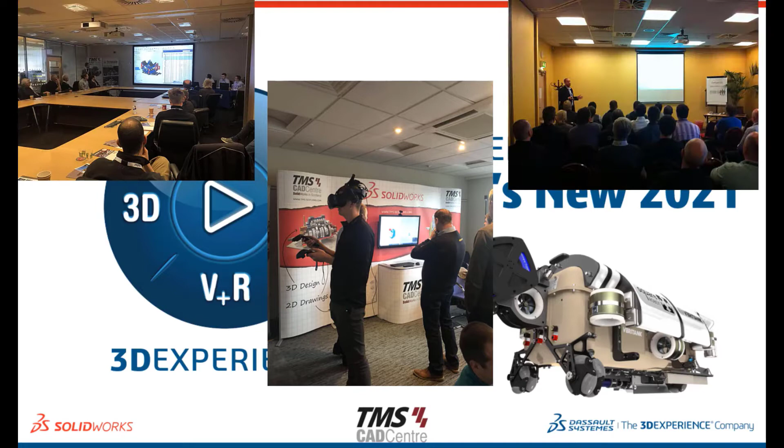Normally, at this time of year, we're travelling around presenting the new tools and enhancements in person at various locations. Like most events of 2020, we've had to adapt this content and deliver it online. After testing several different platforms, we've decided this year's launch event is best delivered through a Teams live event.

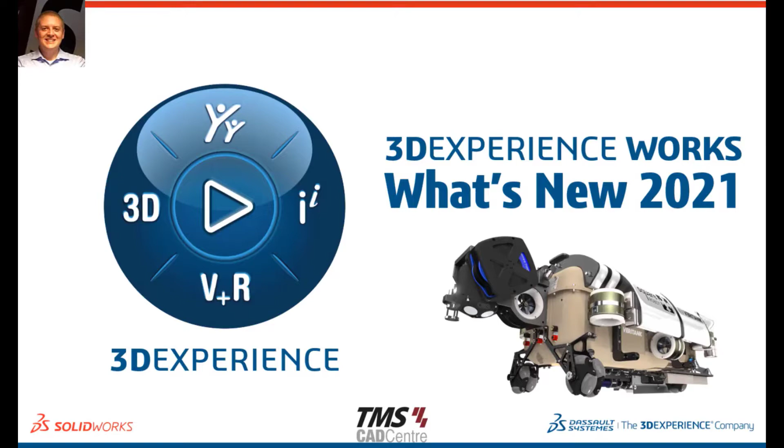Okay guys, so before we get started, we just have a quick video about the model we'll be looking at this year, which is the Square Robot, and you can see it in the background there. So I'll play that for you just now.

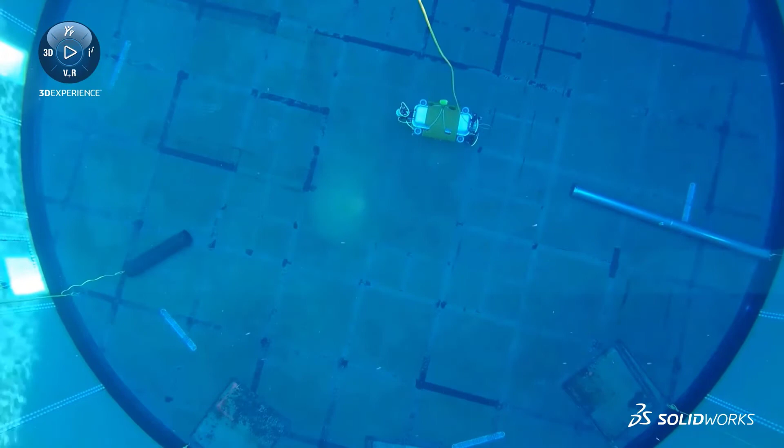Tackling the inspection of dark, harsh, and sensitive environments is the specialty of Square Robot, a startup based out of Boston, Massachusetts. Using advanced submersible robotics lowered into a petroleum storage tank, they autonomously inspect these environments for defects in the storage vessel using state-of-the-art sensing technology. By being able to use robotics for this task, they have reduced costs for their customers while improving accuracy. Their design is focused on safety and reliability for these unique environments, providing maximum uptime and allowing inspections to take place when and where humans would have to otherwise wait for the tanks to be empty.

Founded in 2016, Square Robot chose SolidWorks and Enovia Works as their go-to design and management solutions. It was critical for them from the start to have the ability to work from anywhere, combined with best-in-class design tools.

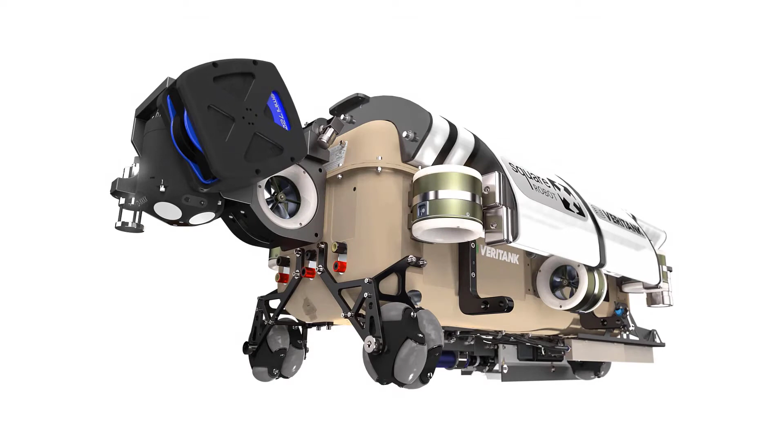So as we dissect this assembly over the next few days, we'll show you some of the enhancements to SOLIDWORKS and to the 3D Experience platform.

If we take a look at what's to come over the course of the event, first we'll have a quick preview of some of the enhancements that will help you simplify and accelerate your use of SOLIDWORKS. Then Craig is going to look at some performance-based enhancements, with an increased focus on performance and reliability this year, as well as some improvements to pre-existing workflows.

We're then going to demonstrate a whole bunch of SOLIDWORKS enhancements one by one, so you won't miss out on anything this release has to offer. Today we'll see parts, assemblies and drawings, as well as a few other tools such as MBD and Visualize, and tomorrow we'll continue this section and take a look at simulation and PDM, among others.

Finally, on day 3, we'll switch focus to the 3DEXPERIENCE platform, but not away from SOLIDWORKS. In fact, we'll show you how SOLIDWORKS can be connected to the platform. We'll also see what we can do when we pair simulation with the cloud. And finally, we'll look at a project from start to finish, completed using the platform's browser-based apps.

Just like everything in 2020 though, things are a little different this year. For example, some of you may be wondering why the title of this event is 3DEXPERIENCE WORKS What's New as opposed to SOLIDWORKS What's New. Basically, Dassault Systemes is starting to fade the line that divides their most powerful solutions, and these solutions are now being united onto a common space, known as the 3DEXPERIENCE platform.

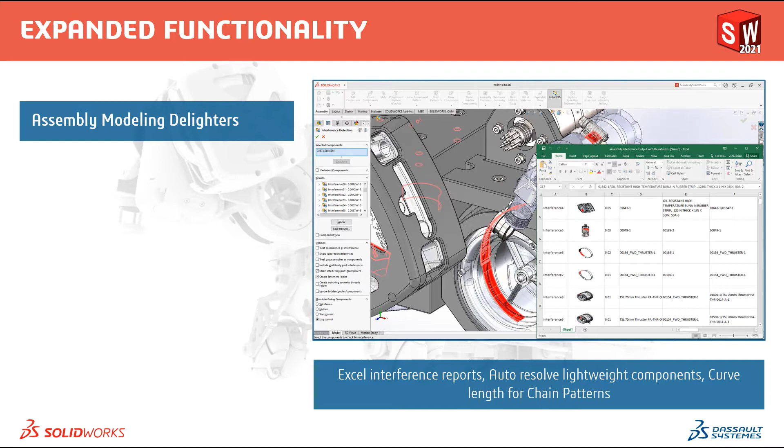We've got some improved assembly simplification tools, so we've got the option to save defeatured models as configurations, and also the ability to toggle between full and simplified versions.

In part design, we have some more flexibility. For example, the redo function is now available on over 60 features. In sheet metal, we can create edge flanges on non-planar edges, and we can now use equations in our file properties as well.

The user interface of SOLIDWORKS is known to be quite intuitive and customizable. However, SOLIDWORKS 2021 comes packed with enhancements that make it even easier to use and even more customizable.

We'll see an improved colour picker, which can reference other applications such as web browsers, a command search within the Customize dialog, making it easier to customize our toolbars. We've also got a collapsible command manager, which gives us some more space to work.

And we've got some semi-transparent dimensions now as well that make it easy to select entities when we're adding dimensions to our models. Last but not least, we have simulation, which is not only easier to use than in previous releases, but also comes with some great improvements to help us get accurate results quicker.

In flow simulation, the free surface option can now be used with rotating regions to take on more complex mixing projects. And with plastics, we have a simplified setup and expanded manufacturing processes.

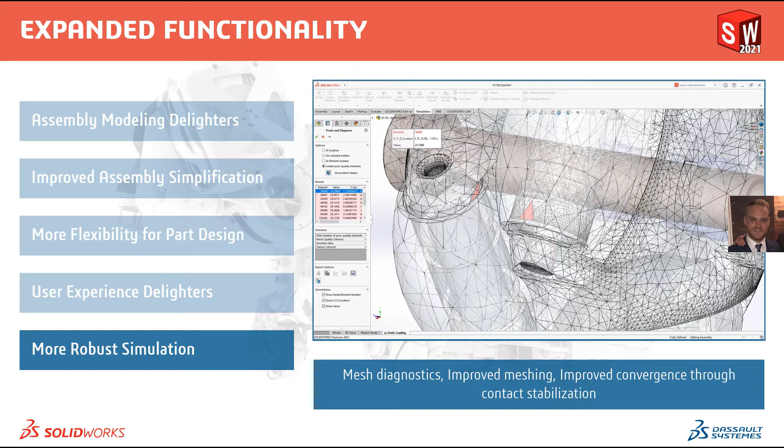We'll see these features in more detail over the next couple of days, but I'll hand you over to Craig now, who's going to take a look at some performance-based enhancements.

Thanks, Scott. All the new performance-based enhancements in SOLIDWORKS 2021, from new performance enhancements to assemblies and drawings to more robust simulations, will ensure that more of your time in SOLIDWORKS is focused on design. I'll go over a few of the performance and reliability improvements briefly now, and then we'll go into them in more detail as we go through the rest of today and the 2 subsequent days afterwards.

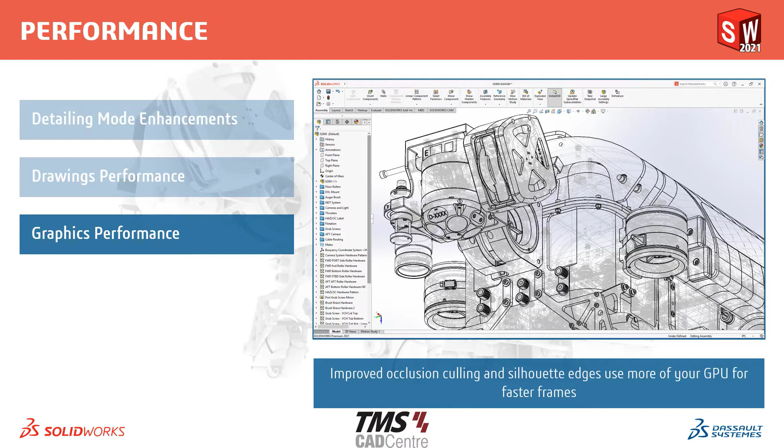Speed up your drawing creations with improved detailing mode with even more editable features and abilities than were previously available. Selection, panning, and fast zoom make your everyday work faster. Improved occlusion culling and silhouette edges use more of your GPU for faster frames. Faster file operations, configuration switching, and automatic lightweight mode resolving all help with the most complex assemblies.

If you're using SOLIDWORKS PDM, you know much of your speed comes from the efficiency of the database. PDM 2021 offers performance improvements that make most of your daily file operations and workflows significantly faster. Those faster operations include things like checking in files, adding new files to the vault, changing the state, opening files from the vault, saving files to the vault, and destroying files, although that last one you probably shouldn't be doing too often.

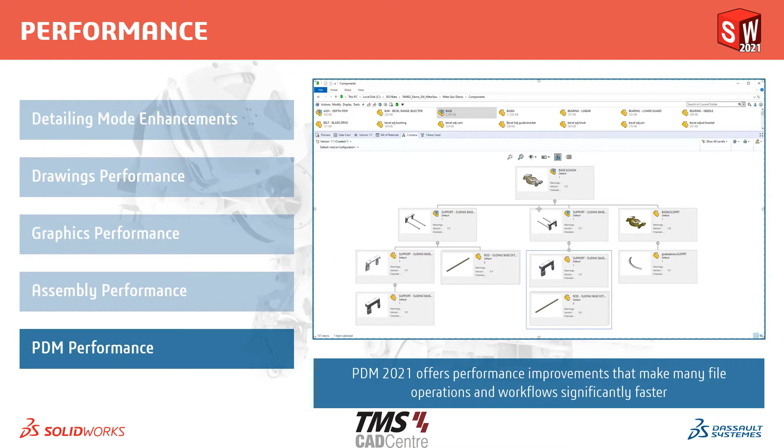Every year, SOLIDWORKS focuses on enhancements, innovations, and quality and performance. This year, SOLIDWORKS dedicated around 58% of its resources focused on the number one thing that you as customers have asked for: quality and performance. These are areas that SOLIDWORKS always focuses on, but this year there's been an extra effort to achieve even more remarkable improvements for this particular area.

The second two largest areas were enhancements, so actually new features to the software, as well as starting to integrate the 3DEXPERIENCE side of things with SOLIDWORKS, so there's a combination between the two. These focus areas were also partially derived from customers themselves, so there was a survey that went out last year on the SOLIDWORKS forums asking users what areas you would like SOLIDWORKS to focus on more, and that's what SOLIDWORKS tried to replicate here with the results from that survey.

SOLIDWORKS 2021 and the development cycles associated with it have closed more SPRs than any other release of SOLIDWORKS ever. If you're unsure what an SPR is, it's a software performance report, and pretty much any time someone finds a bug in the software, that's where an SPR is then created for the development team to work on and fix for a future release. This has resulted in a 25% increase in verified fixed SPRs since 2015, meaning that more SPRs, more bugs are being fixed with the newer releases.

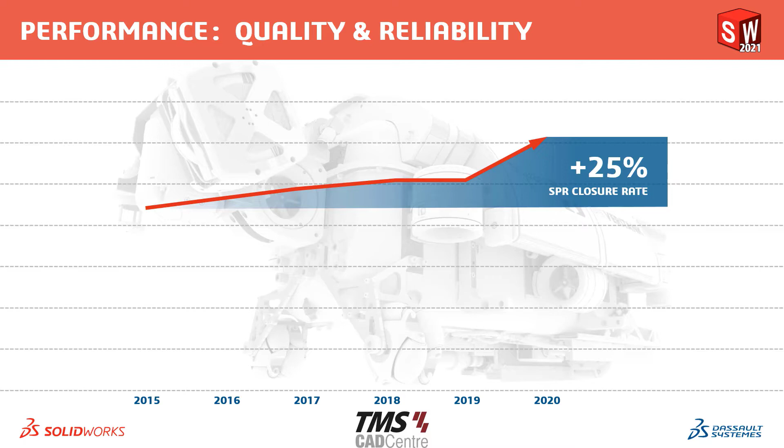It wasn't just about fixing low-hanging fruit, small wee tiny bugs. The focus was on areas that matter most to you and that have the largest impact. SOLIDWORKS categorise SPRs based on 5 severity levels, severity 1 and 2 being the most critical, as they have the most significant impact on day-to-day users. Severity 3 and 4 focus on the tools that you still use every day and making sure they work and give you the results you expect.

Finally, there's Severity 5. These are things like minor nuisances with the user interface, and these are still important, and that's why they are still fixed with SPR releases, but obviously that priority is generally with the higher severity issues. The predominant focus in this area was really to close down anything in that severity 1 through 4 range that has the most impact on users.

Over the last year, we've seen that significant reduction in open SPRs for severity 1 through 4, open meaning they haven't quite been resolved yet. SOLIDWORKS' goal over the next release is to get this down to less than 10%. They might not quite be there yet, but this is the focus to ensure that you guys as customers have the most robust and reliable design tools available.

So that's a brief overview of the performance side of things. So now I'll pass it back to Scott, who'll get into the meat and guts of SOLIDWORKS itself and everything that's new inside there.

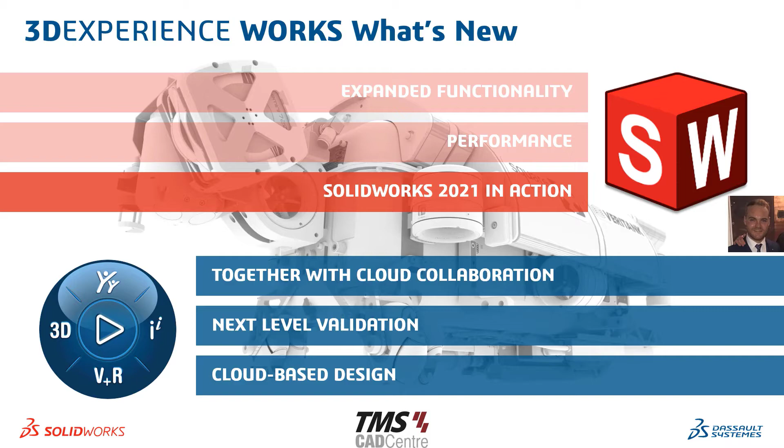Thank you, Craig. So now that we've seen some of the highlights, let's take a more detailed look at SOLIDWORKS 2021 in action. So each section that you see here has several demonstrations which highlight the enhancements made to SOLIDWORKS 2021, and we'll start with what we could call the essentials, so our parts, assemblies and drawings. Then we'll move into some of the other tools we have in SOLIDWORKS such as MBD and Visualize. First of all though, we'll look at the user interface.

So customizing the user interface is really about finding a balance between minimizing clutter and having your tools at hand when you need them. With SOLIDWORKS 2021, you no longer have to choose between one or the other. So for example, to complete this part, we need to cut and pattern this sketch.

We might notice that the sketch and the part color are similar, so we can change these color settings, which is something that's always been available, but in SOLIDWORKS 2021, a column of representative colors is shown here, which makes it easy to find the item that you would like to change. So if we set our inactive sketch color here to a green, we can make our sketch more visible on the part.

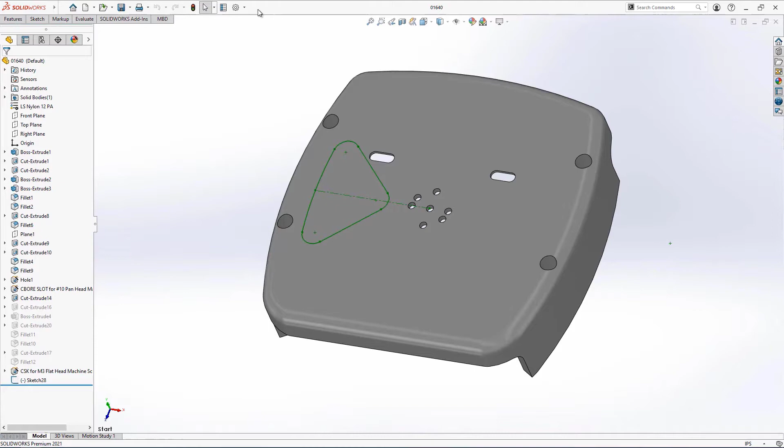Also new in SOLIDWORKS 2021 is the ability to collapse the command manager, allowing you to reclaim as much screen space as possible. Moving the quick access tools to the command manager further reduces the amount of space taken up by your icons and helps you focus on your design instead of navigating the menus.

All our tools are still available using the tabs at the top of the screen, but a faster way to work is to use the S key keyboard shortcut. However, it doesn't yet have the pattern command that we need. This isn't a problem though, we can simply search for the command, which is new to 2021, and we can drag and drop that onto our shortcut bar.

Now this is a convenient way to customize any area of the SOLIDWORKS user interface, including the heads-up display toolbar, as we can see here as we add the redo function. And once we've got our shortcuts set up and ready to go, finishing our design requires minimal effort. So notice here how little the mouse is moved when we create this cut and then pattern it around the center hole. And making a mistake is also easy to correct using the redo feature that we've now got added into our heads-up display toolbar there.

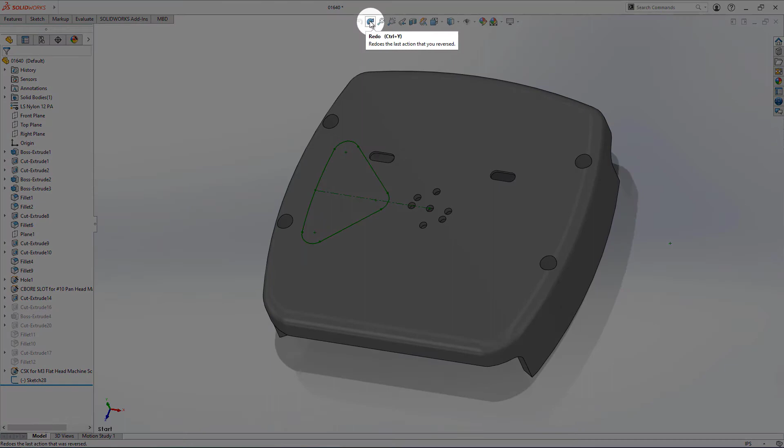And with SOLIDWORKS 2021, redo is much more complete and allows you to redo feature edits now as well. That means that if you accidentally undo a feature, you don't have to spend the extra time recreating it. So with SOLIDWORKS 2021, you no longer have to find that perfect balance between clutter and quick access to the tools that you need. Simply customize your workspace using these new enhancements and you can carry on with your design.

Now you're still stuck with me for this next section, I'm afraid.

We're now going to look at what's new with parts. So SOLIDWORKS 2021 introduces many enhancements to increase our capabilities when working with parts. So let's focus on the parts in this assembly that we want to work on. And as we go, we'll take a look at some enhancements to sheet metal, 3MF support, and some new capabilities in weldments. And of course, as we go, we'll slip in some other bits and pieces along the way.

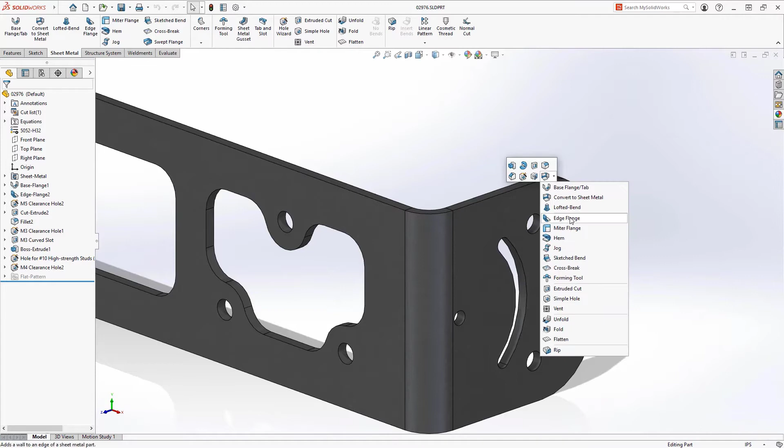So when working with sheet metal parts, we were able to create an edge flange on curved edges like these on the right hand side here, but we were limited to curved edges originating from planar faces. And now in SOLIDWORKS 2021, edge flanges can be created on curved edges like these, originating from non-planar surfaces though, such as those in the bend area. So the preview here shows how the edge flange will be created all the way around the part.

And if we go over to our Property Manager there, we can see that familiar customization tools are available to help define the edge flange, such as the length, the angle, and the flange position, as we can see there. So as we come out, we can see that this flange looks great, and will provide more stiffness to this angle bracket. And of course, this edge flange can be flattened, ready to be detailed, or exported to DXF for fabrication.

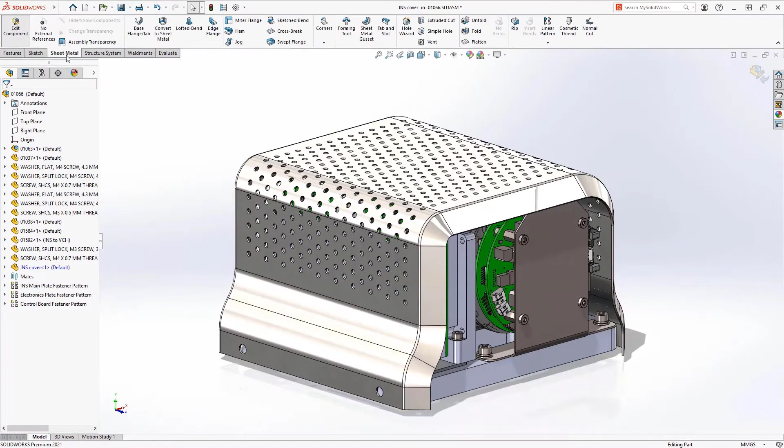Now this new edge flange is great for structural integrity, but it's also useful for enclosures and guards, such as this cover we have here. Now, the edge flange on this side needs to protect the components of the control unit, and we can now change the direction of the flange as well as the angle to wrap around the internal components and keep them safe. So you'll see here that we've reversed the direction, we've changed that angle to 45 there to make our adjustments. Now, this new edge flange capability along non-linear edges extends the sheet metal capabilities of SOLIDWORKS 2021 for many applications such as adding stiffening ribs and enclosures.

If we take this LED light assembly, which contains parts of various colours, textures and transparencies, but needs to be 3D printed, we can see that in SOLIDWORKS 2021, support for import and export of 3MF files gets even better. So colours, textures and transparencies are now supported on export, like we can see here, and this information is stored in the 3MF file to be used for manufacturing or for other applications.

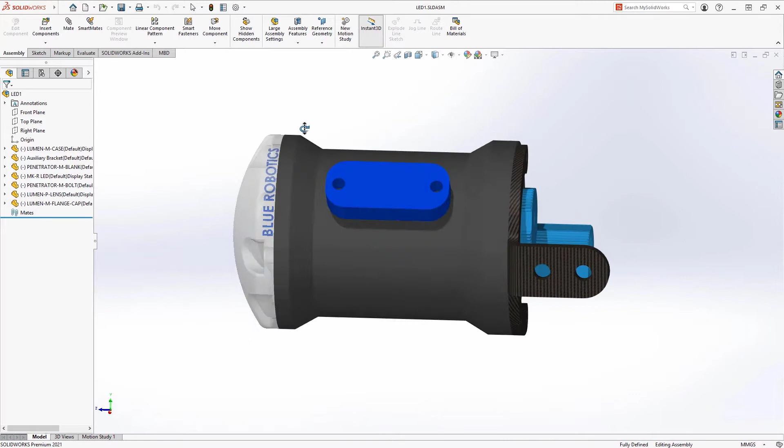So we'll see when we open a 3MF file in SOLIDWORKS 2021 that SOLIDWORKS now supports many more appearances, for example per facet and per vertex colouring, as well as textures and transparencies which can now be visualised when importing 3MF files as graphics bodies. Additive manufacturing continues to rise in capability and popularity, and SOLIDWORKS continues to embrace these technologies and move with them.

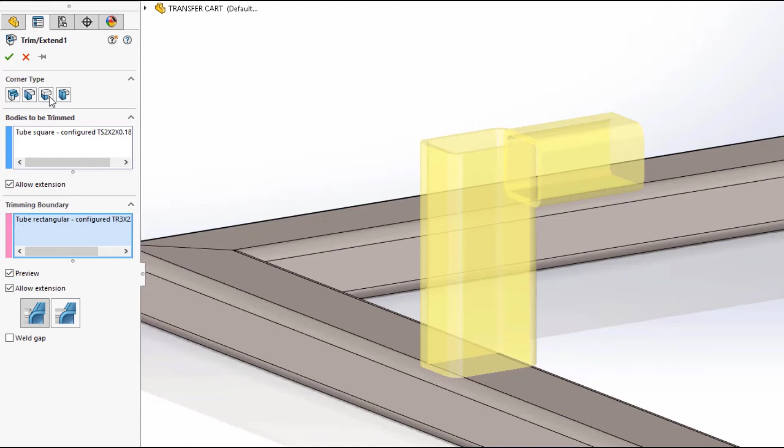When working in the weldment environment, it's common to use various sizes of weldment members. The horizontal sections in this welded frame are 2x2 square tubes, and the vertical sections are 3x2 rectangular tubes. The trim and extend tool is used to trim the tubes to each other, with various options for the corner type. So the two end butt trims dictate how one tube trims to the other, and the miter trim bisects the angle between the two tubes, creating an equal angle trim.

Since these tubes are of different profiles, the equal angle miter does not produce the desired result. In SOLIDWORKS 2021 though, there's a new option for miter trims, which is called the flush miter, which does just that. So it trims the tubes so that they sit flush with one another. And in this case, the other vertical members are mirrored, so when we hit the OK button here to accept that change, that will update the rest of them as well.

So this part also needs some appearances applied to it as well. So let's edit appearance and choose a colour. Now we have a wide variety of colours to choose from on the colour palette, or we can use the colour spectrum to define a custom colour, but sometimes we need to use a specific colour that's been dictated by a customer. So if we take a look at the Square Robots webpage, here we can obviously learn all about their products and their initiatives, but what we really want just now is the colour on the banner at the top there.

Now in SOLIDWORKS 2021, there's a nice option to easily select colours that do not exist on the palette. Just drag the dropper icon over any area of the screen and that colour will be selected. So if we take that here and we drag it over that blue section of the banner there, we can use that to colour these bodies there.

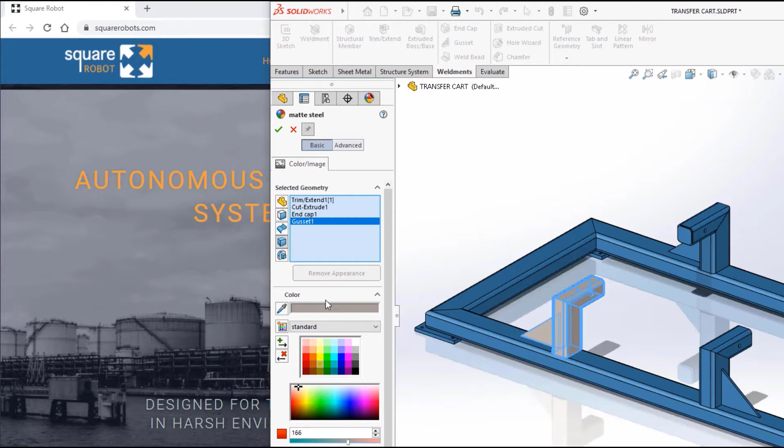For the vertical members of the weldment though, we'd like to have a different colour. So let's select several of these bodies just now, and we can use the orange colour in the logo and apply that to the bodies as well there. So this new colour picker works on any image displayed on the screen. I think you'll agree it's quite a nice little addition.

Now another area of SOLIDWORKS with some enhancements is custom properties. The custom properties, as we know, are a great way of storing information about a document, such as the description or the creation date. And these can be used to automatically populate title blocks, bills of materials, or PDM data cards. Sometimes it's necessary to calculate a result, though, to define a custom property. And in SOLIDWORKS 2021, equations are supported in custom properties.

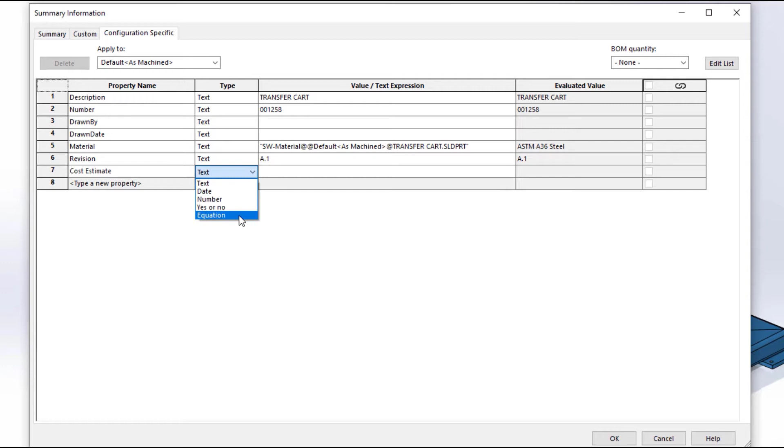So if we just define our property name here, we'll see that we can actually choose equation as the type of property that we want to create, as we see there. And with that, we have access to global variables, functions, and a whole bunch of other properties, as we can see here in the value field. We've got access to all the usual functions, properties, everything that you would expect.

So for this weldment, we want to define an estimated cost that is based on this global variable multiplied by the mass of the part. So we can go and use both of them in this equation, and you see that calculates our end result there. Now, equations can be used in cut list properties as well.

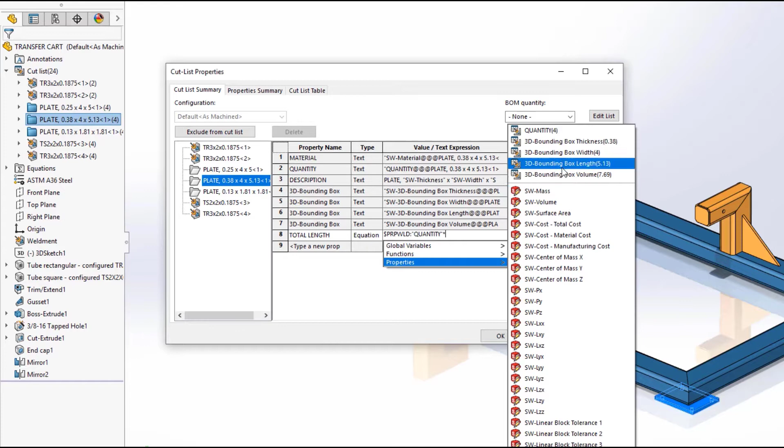So this plate in the cut list is used 4 times, and we would like to know the total length of all the plates together. Again, we can define the property name and choose equation as the property type. And for this calculation, we want to multiply the quantity of plates by the plate length, which results in the total length on the right-hand side, which we'll see in just a second. There we go.

So parts are the foundation for creating assemblies and drawings, as we know. And with these new additions, we can see that SOLIDWORKS is continuing to enhance its already powerful capabilities in the parts department. So with that, I'll hand you over to Kieran, who is going to take a look at some of the enhancements in assemblies and drawings.

Thanks for that, Scott. That all looks great. I really like the addition of the equations within the custom properties. Really good thing to see that they've added in there.

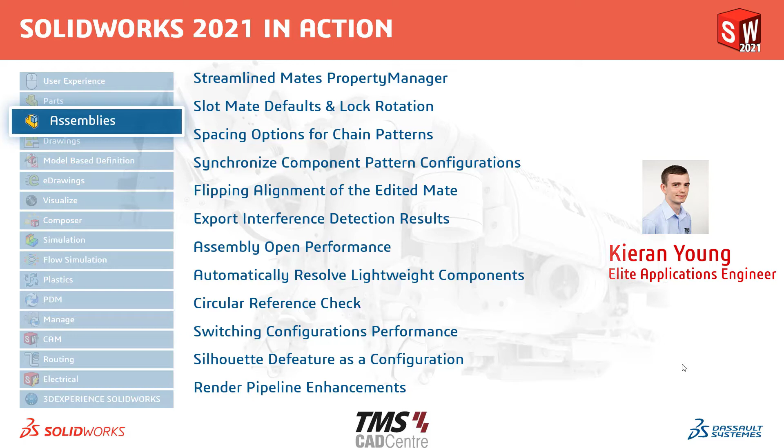Moving over to assemblies. Now we're going to break this up into 3 mini sections here. So we're going to start off by looking at some little assembly delighters within there, things just to make things a little bit easier. We'll then swap over to assembly performance and any enhancements that have been added there. And then finally, we're going to wrap it up with some graphics improvements that have been made within SOLIDWORKS as well. So starting off with those delighters then.

So with this design that we have here, I've got this little bolt and I want to mate this into position. Now, that's where the first enhancement that you'll notice is. Within the Mates Property Manager here you'll see that we no longer have the individual drop-downs for the different style of mates. We now have individual tabs for each of them, making it quicker and easier to flick through the tabs and find the mate that we're interested in.

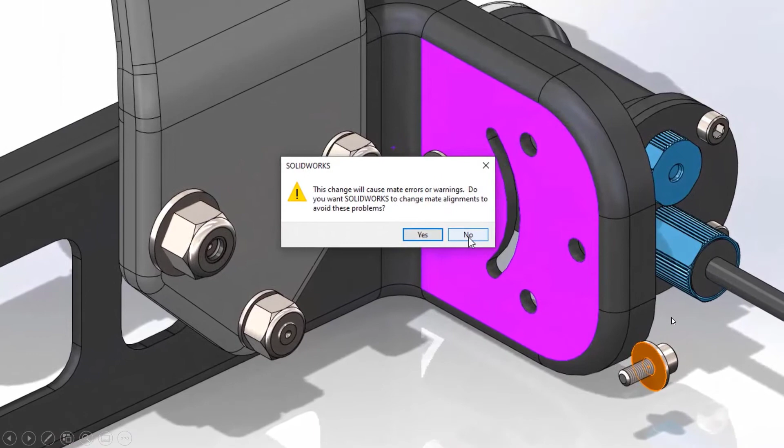Once we've got the mate that we want, we can then accept it, and I'm pretty sure we'll have all been here before where it is not quite mated in the right direction, and we've long been able to use this option to flip the mate alignment. Now, I'm pretty sure, again, most of us have been here before where we flip the alignment and we get this little dialog box, and do we click yes, do we click no, what's going to happen? And unfortunately, we've clicked no, and all of a sudden we've got all these errors in our tree.

Now, what we actually have within SOLIDWORKS 2021 is a new addition of a system property within the assembly section here, where we can have it so it always prompts or always uses one of the options within there. So in this case, we're going to say that we always want it to click yes on that little dialog box. So what's that going to do? Well, we'll try and add that mate in again. Got it in here. I'm just going to flip that round, and this time the dialog box doesn't even pop up, it flips it automatically, and it flips the alignment of any corresponding mates that may cause any issues.

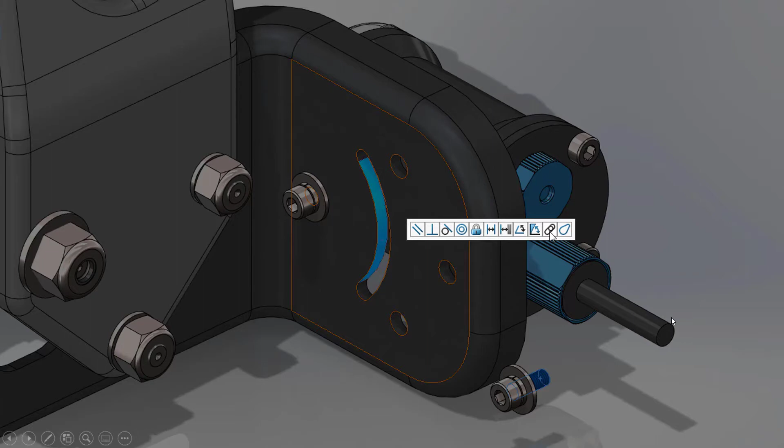Finally, I want to finish off this design by adding in a little slot mate to get this bolt into position. And one thing you'll notice is it's defaulted to center in slot instead of the free option. The other thing you'll notice is we have the addition of the lock rotation within here as well. However, going back to that default slot position, again, this is an option that's been added in within the document properties here, where we can set up the default location for our slot mates.

This means that we no longer need to spend additional time defining the position of it, or even worse, potentially selecting the wrong position and having to go back and correct it at a later date. Now remember, that is a document property, guys, so if we do want to use it and have it set up by default, we need to add it into our document templates.

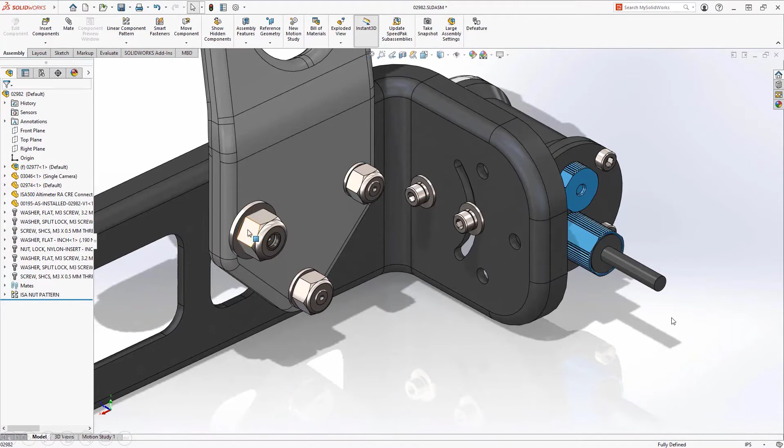Moving on to component patterns, and as you can see, we've always had the ability to change the configuration of individual instances of a pattern. However, in this case, I actually want all of my bolts within the pattern to be of the same configuration. Well, with SOLIDWORKS 2021, we now have the ability to synchronize this configuration with the seed component. With that selected, we'll then flip over all of those other instances of the component.

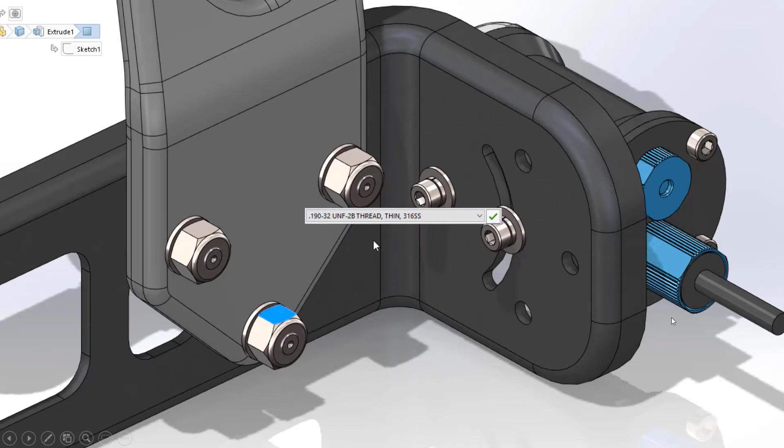And what you'll notice is I no longer get the drop down for the configuration on one of the instances, and the previously seen option is also grayed out. I can then go through the seed component and change the configuration, and that'll filter through to all of the instances of that component within the pattern, making it quicker and easier to define our assemblies.

Now, another useful tool that we can find on the evaluation tab is interference detection, and it's been one that's in there for a while.

This is a great way, if you're not the person that actually changes any of the design or anything like that, you're simply viewing it and critiquing it if you wish. You can basically populate out this document and pass it over to someone else to check over and fix any errors that may be in there.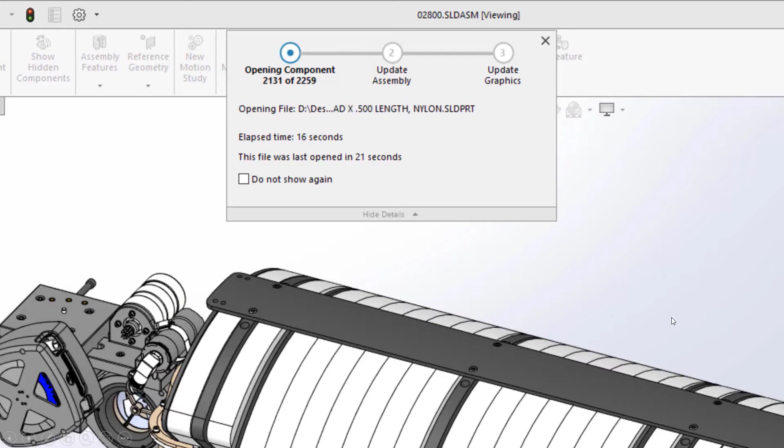Now that covers the lighter side of things, so moving over to the assembly performance enhancements. And I know we say it every year, but SOLIDWORKS 2021 truly is the fastest release ever. Take this assembly for example. It's got 2,259 components in it. Despite that, it opens up in as little as 21 seconds. As you can see, lightning fast.

Now, these enhancements have been added for both resolved and lightweight assemblies, so you should see enhancements for both of them. Further enhancements for lightweight assemblies are the streamlined workflow for it. Now, by simply digging down into our Feature Manager design tree, we can start to resolve individual assemblies and components as and when we need them, making it quicker and easier to dig down into the components that we want, whilst not waiting for other assemblies and parts to resolve that we don't really need to work on at that time. Again, just making it quicker and easier to get to work on your designs.

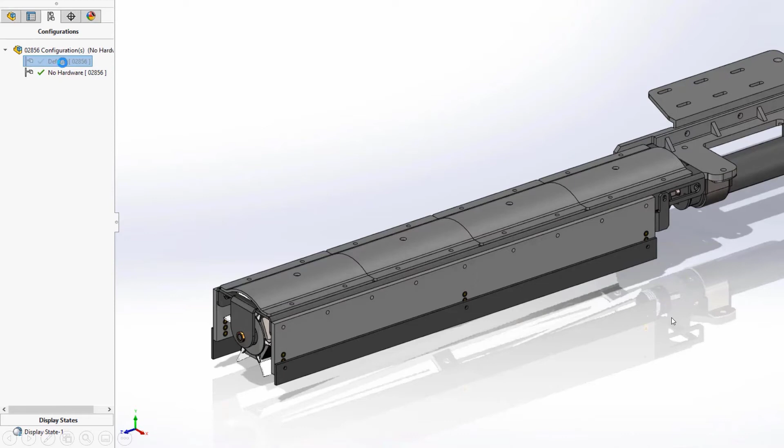Configurations are also even faster within SOLIDWORKS 2021, whether that be adding new configurations or even switching between configurations. You should see that the load times are faster.

Now, finally, another tool that's within the evaluation tab within SOLIDWORKS, and it's been in there for a while, is the performance evaluation. Now, this is a great one for trying to see what's happening within our assembly, something that might be slowing your assembly down along those sorts of lines. But with SOLIDWORKS 2021, we now have the addition of the circular reference report within here. So what this is going to do is basically indicate any circular references within our model.

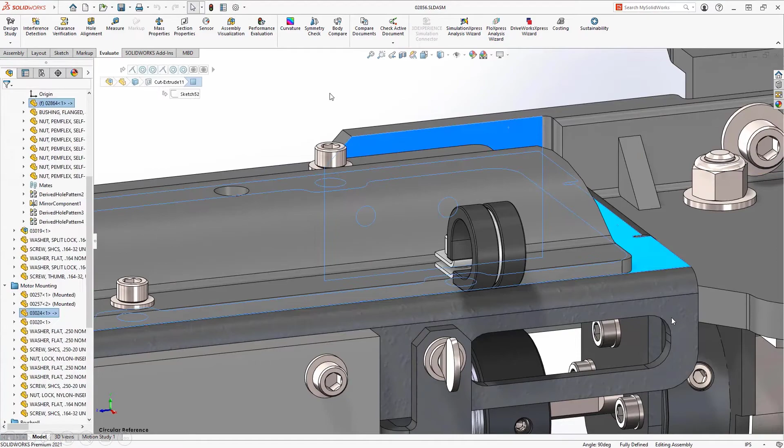In this case, we've got two sets of holes on two different parts, which are each referencing each other in order to locate them. So we can now start to use this information, dig down into our model, and see what exactly is going on with it. In this case, we'll isolate out the components and dig down into the features. Now we can see that we have a hole wizard hole within here.

Look into the positions of it, and sure enough, this one has two external reference coincident mates, aligning the center points with the edge of the other component. That's okay, that's quite a standard top-down assembly modeling technique, but let's have a look at the other component. Again, we've got a hole wizard hole. You can dig into the positions a little bit, look at those relations, and sure enough, we've got the exact same thing. So each hole centre point is trying to align itself on the edge of the corresponding hole.

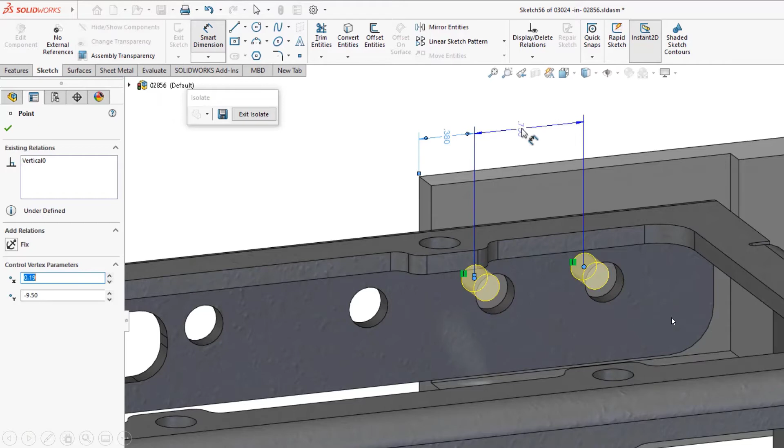To resolve this, we're just going to delete this out and add in some mates to define it instead. Now it's these circular references that start to slow down our assemblies. If you imagine, the software is trying to look at both holes in order to align them with each other. So where exactly is that position if they're trying to align off each other and there's no dimension to reference it?

Now that we have that one solved, we can then jump back into our assembly. And another useful tool that's been within SOLIDWORKS since 2019 is the Silhouette Defeature tool. Now, the Silhouette Defeature tool is a great way of creating a simplified version of your assembly, or even a great way of trying to hide out some proprietary information within there.

Now, the way the tool works is we can simply go through and select items that we want to include, and add those into groups in order to simplify that down. The other great little addition is we get a nice little preview window, so we can start to see how the simplified version is building up as we step through this one section at a time.

Now, as we're going through selecting either individual bodies, parts, or even assemblies, we can select the simplification method that we want to use. Whether we want it to be a simple polygon outline, a cylindrical shape, or even in some cases, we might even want a bit of a tighter fit for some of these components.

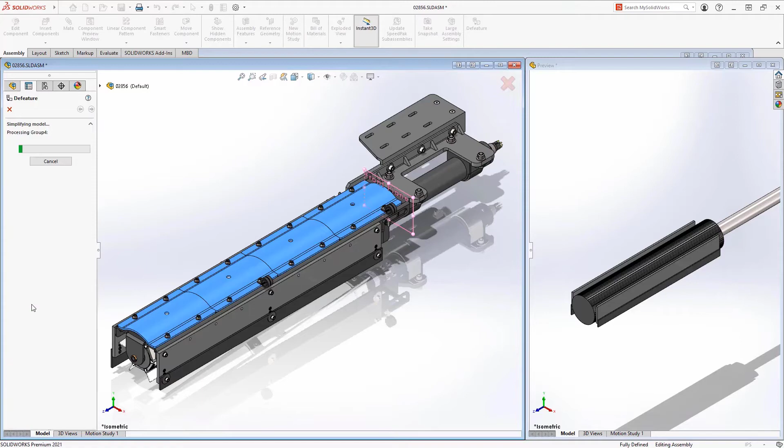Once we've got those in place, we can continue on to the next step. Again, it's just picking our components and selecting the simplification method we're looking for. Just going to finish off this design, got a couple more components to go. Again, I'm going to go with the tight fit option in this case.

To finish this off, there's some information which is pretty critical to the design, which I want included in the top level assembly. In this case, I'm just going to say I want to copy this geometry exactly.

The addition to SOLIDWORKS 2021 is this ability to create a new configuration of this simplified version, whereas previously this needed to be a separate part that was saved out. Now, if it's proprietary information that you're trying to hide, I would recommend you still go with the new document option. That way you can easily maintain information that's being shared out with your company.

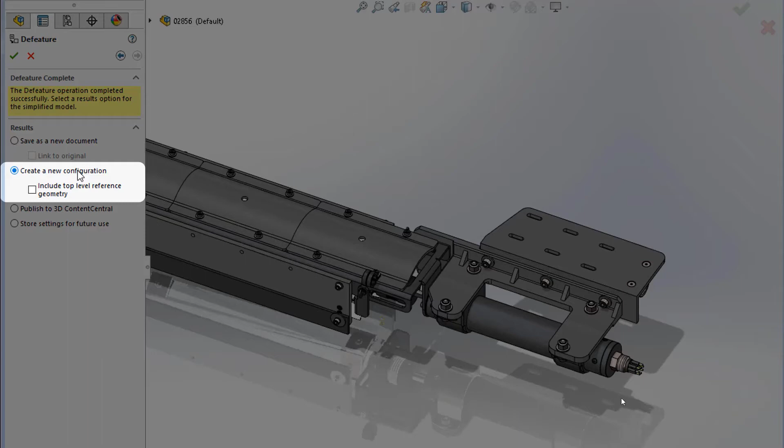However, with SOLIDWORKS 2021, the ability to use this configuration has never been easier. Now, just to see what exactly has happened here, we can dig down into the configuration manager, and what we'll find is we now have a new defeatured configuration within there.

To make it nice and easy to use at the top level assembly, we can now quickly and easily right click on the assembly in the feature tree and use the option to use the defeatured component or configuration. This can also be done from the top level by right clicking on the top level assembly and selecting to use all defeatured configurations. Likewise, we can also use the parent configurations that way as well.

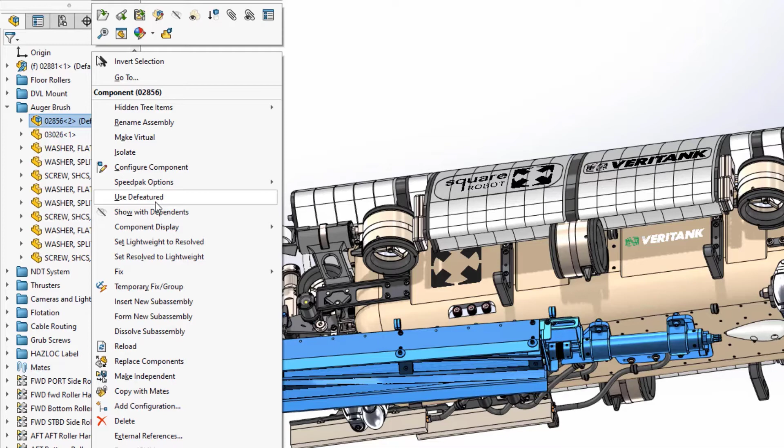I'm sure you can agree that that is a useful little tool to have within your top level assemblies, and it'll speed your assembly up even quicker than it ever has been before. Now, that wraps up the performance side of things for assemblies, so let's jump into the graphics improvements instead.

For example, we'll have a little look to see what it does here. On the left-hand side, we've got a setup where it's using the enhanced graphics performance, and on the right-hand side, that option is turned off.

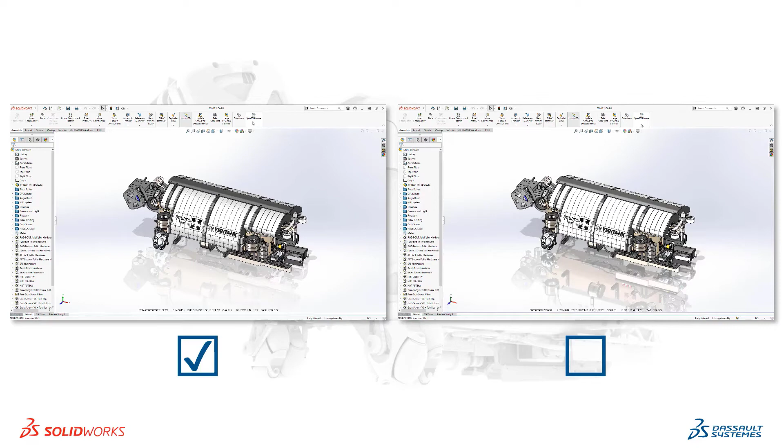What we're now going to do is run a little macro, which will do 500 mouse rotations of this assembly. You can even see just from comparing the images that the option checked on is a lot faster. In fact, it did it in less than 8 seconds compared to the option turned off, which did it in over 160 seconds. So it's a no-brainer - why not use it?

Well, that's the availability that we have within SOLIDWORKS at the moment. So what's new to SOLIDWORKS 2021? We've actually got two new improvements for the enhanced graphics.

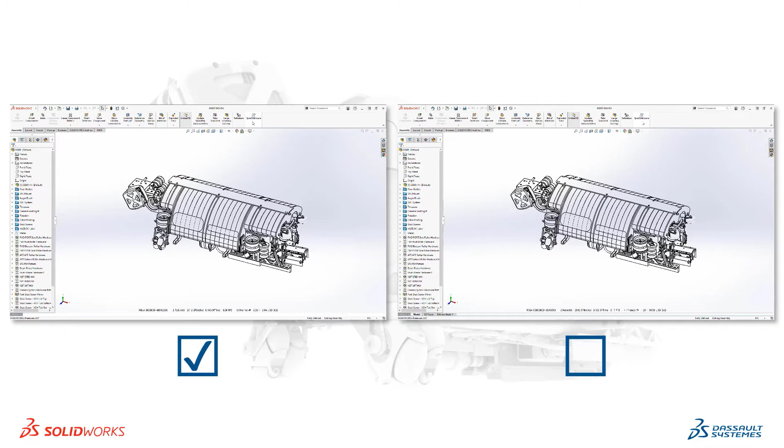The first improvement is when it comes to our hidden lines removed and hidden lines visible option. Now, calculating silhouette edges has always been a heavy CPU process in the background. However, with SOLIDWORKS 2021, this has now been pushed onto our graphics card instead.

Again, we're going to run the same macro this time, doing those 500 mouse rotations. And again, the comparison is striking - with the option turned on, it's done it even quicker this time, less than 5 seconds compared to the option checked off, which is 170 seconds.

Moving on to the second enhancement, which is what we call occlusion culling. In this developer build, you can see that not all of the components have been rendered, and that's basically the enhancement here. Any components which aren't seen from the view we're looking at, hidden in the background, are no longer rendered unnecessarily - again, lightening that load a little bit, making assemblies move a lot quicker.

Now, in this case, there weren't too many components that weren't rendered. So as I suggest, the larger the assemblies, the greater the performance boost you're going to see.

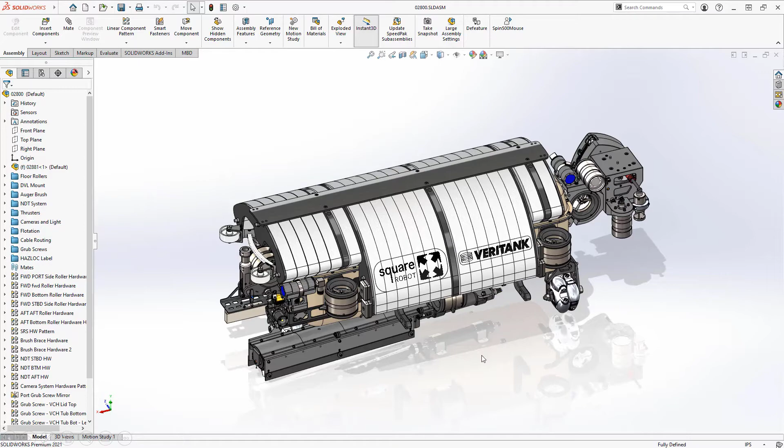That wraps up the assembly section for the enhancements in SOLIDWORKS 2021, and I'm sure you'll agree there's some great stuff within there. However, we're now going to move on and have a look at the drawing enhancements.

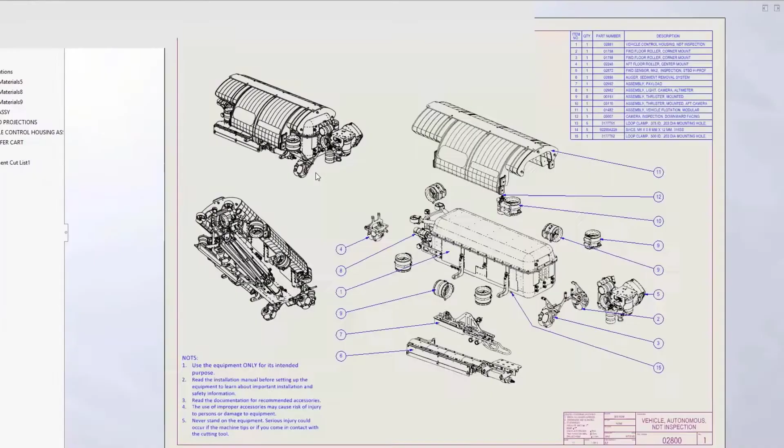Looking at drawing performance, one thing users have always asked for when it comes to drawings is the ability to have speed on their side, making things quick and easy to change in detail. One thing added within the past couple of years is detailing mode, a great way of opening drawings nice and quick. However, with SOLIDWORKS 2021, the enhanced graphics performance we saw in the assembly environment has now been pushed into the drawings environment as well, so all the benefits we saw there are now in our drawings too.

Just to see how this works, we're going to do a comparison between 2020 and 2021. If we open the same drawing in both applications and pan around in 2020, you'll notice a bit of lag and delay as we move the sheet. If we try the same thing in 2021, the sheet moves exactly where my mouse is, so performance is a lot better.

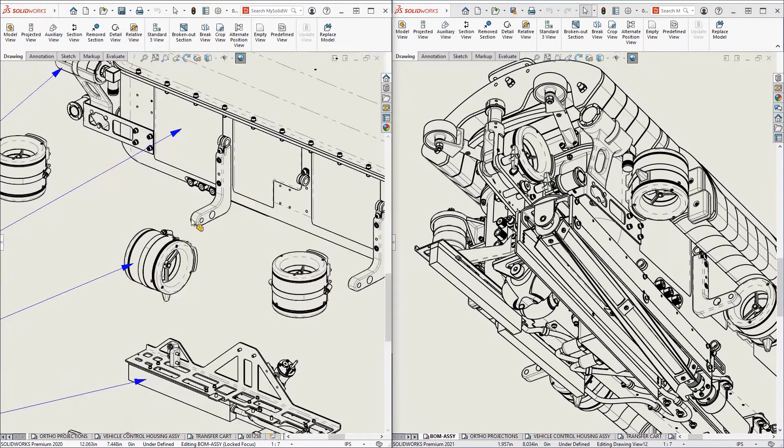If we start zooming within a sheet, it's pretty instantaneous, even with views that have a lot of detail in them. Try the same thing in SOLIDWORKS 2020, and again we get that lag, a little bit sluggish. The same thing can be seen using our scroll bars to pan around the image - a bit of lag in 2020, whereas in 2021 everything is a lot smoother.

If we swap over to sheet number 2, you can see there's a lot more views and detail in here, and again it's a little sluggish in 2020. However, in 2021 it's a lot smoother. Because there's more detail in this sheet, you'll see much greater improvement - the more detail, the more improvement you'll notice.

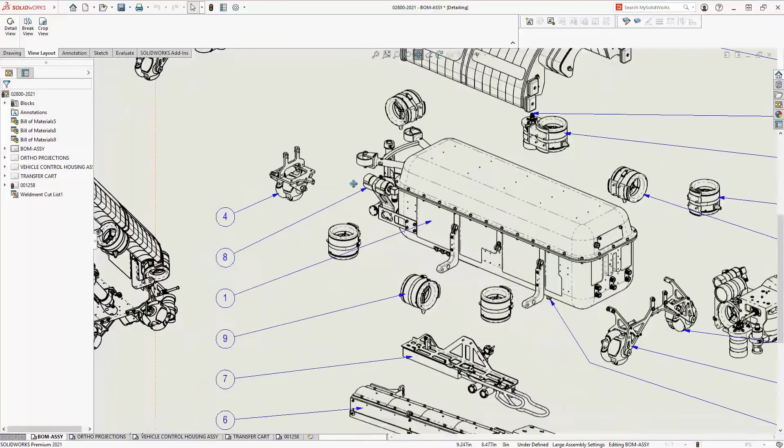Going back to detailing mode, it's been added for a couple of years, but with SOLIDWORKS 2021 there have also been enhancements to it. It opens our drawings quickly and we can move around fast because it's not loading unnecessary data. It also allows us to edit any annotations within our drawing. As we flick between different sheets, there's no loading time either - all the information pops right up because it's not loading excess information in the background.

Going back to the enhancements for 2021, we're now able to edit any existing annotations. For example, with this note we can edit any of the text or remove any we're not interested in anymore, and this is all within our detailing mode.

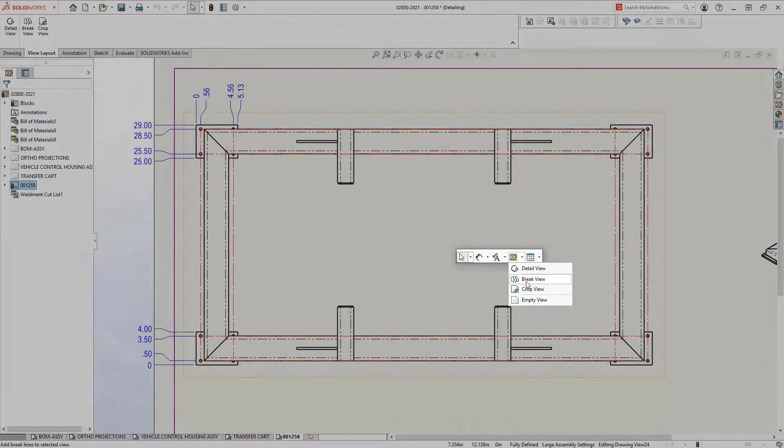If we look at this view, you'll notice we have some break views in it, however we don't quite have that in the view above. New with 2021, we now have the ability to add detail views, break views, and crop views all within our detailing mode. So if we drop in our lines here quickly and easily, I'll start adding those in where we want them. You'll also notice all the different break line styles are still available within detailing mode.

Not only that, we also have the ability to add to existing ordinate dimensions within here. So I pick up some of these edges and center lines, and it just adds on to any existing ones that may not have been added within our detailing mode.

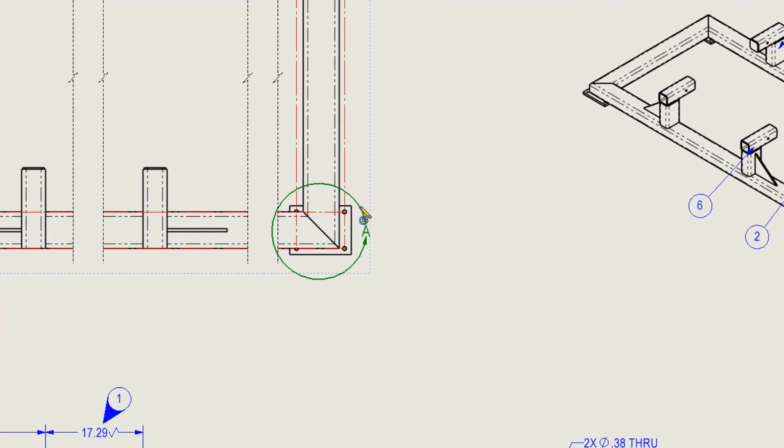Going back to the different views we can create, our detailed view works just the same way as any other detailed view we're used to creating. We can sketch in our circle or select an existing sketch, and finish this off by adding a little hole callout for extra information—a nice enhancement to SOLIDWORKS 2021. Simply select the hole callout and it pulls through that information.

Finally, we could add in some dimensions, and again, the ability to add foreshortened dimensions is also within detailing mode. Another enhancement is that when I select this dimension, all of the properties from the dimension are now available within the property manager. I can add in any tolerance or precision I want, and it will automatically update.

Likewise, for this dimension here, you can see it's not quite centered about that circle correctly. Since I have access to all the properties within my property manager, I can change that arc condition so it now centers to that hole and drops in where I'd expect. There are some nice enhancements to detailing mode, making things quicker and easier as we detail our drawings.

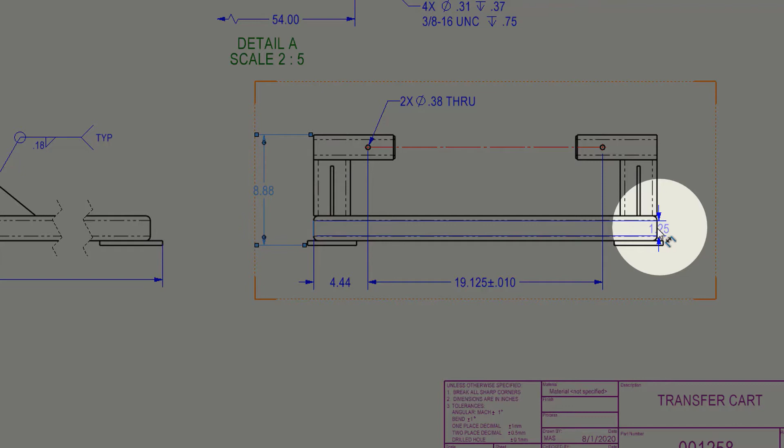Those aren't the only enhancements. Another great one is that as we add in dimensions, it's even easier to make our selections. As we make our second selection, you'll notice the dimension fades out, so we can easily see any edges hidden behind the dimension we're dropping in.

Another little enhancement, from a user enhancement request, is the addition of VDA balloons. This is something widely used within the automotive industry, so users asked for it and SOLIDWORKS provided it.

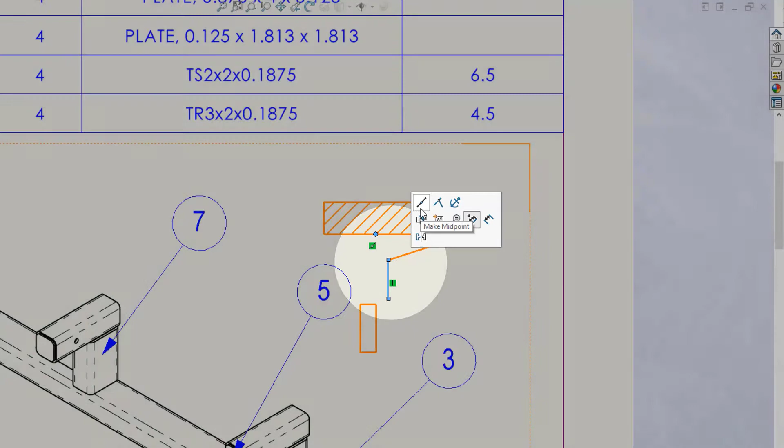To finish off this section, this drawing has a little sketch up in the right-hand corner. To define this sketch, we'd typically go over to the property manager on the left-hand side to add relations. However, to match it up with the part environment, our relations are now added to a quick little flyout right next to our mouse, so we can keep all our attention on the graphics area. We can then snap it into place, making these changes quicker and easier than ever before within SOLIDWORKS 2021.

I'm sure you'll agree there are some great enhancements when it comes to drawings. A quick section, but action-packed, and I'm sure you'll take away some benefits from it. Following on from this, we're going to move over and have a look at some MBD.

Thanks for that, Kieran. So what I'm going to do next is take you through two sections on MBD, or model-based definition, as well as eDrawings, and then we'll move on to some of the other sections.

New in SOLIDWORKS MBD 2021 is support for datum targets in the MBD environment. Bend tables can now be tabulated in the 3D PDF, similar to bill of materials. There are also additional options for HTML outputs when it comes to the 3D PDF side of things.

SOLIDWORKS MBD provides an integrated alternative to creating 2D drawings, which helps you define, organize and publish 3D product manufacturing information, or PMI, into industry standard formats.

3D views provide an easy way to organize information for individual manufacturing operations, capturing model orientation and displaying the relevant PMI data, removing ambiguity and making it easy to understand.

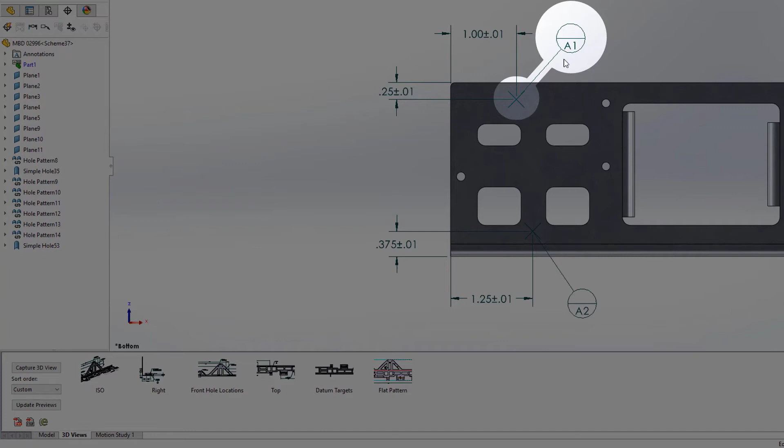Datum targets are useful for defining points or areas of contact to establish a datum to simulate a mating part or fixture. In SOLIDWORKS MBD 2021, datum targets are available in the MBD environment. Locating dimensions can accurately define the location of the datum target and are fully editable just like any other dimension.

Let's set up a datum target on the far end of our sheet metal part. The first selection establishes the datum reference framework, in this case datum A. Then place the target and its balloon. The datum target can be defined as a point, circle or rectangle. For this one, we'll make it a 1/4 inch circular target.

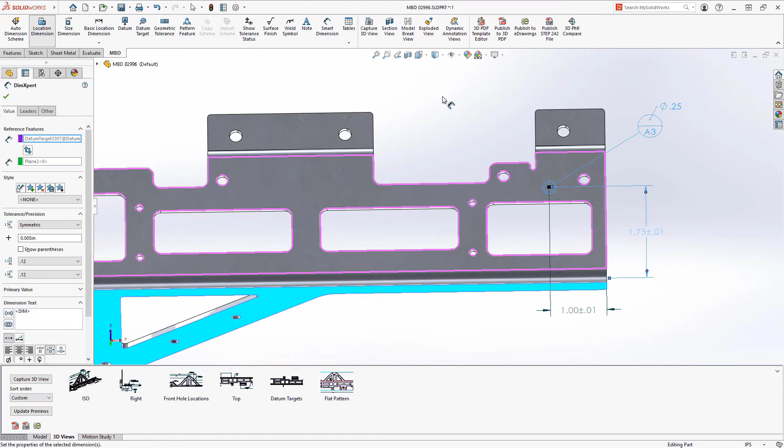Locating dimensions can be applied to define the position, and for this target we'll make it, let's say, 1 inch from the far end, and from the vertical flange, which is going to be datum B, we'll make it 1 3/4 inches, and the datum target is now fully defined.

Flat patterns in 3D views have been available in the past, including bend tables and bend notes in the 3D view, but now in SOLIDWORKS MBD 2021, this bend table information can be published to a 3D PDF in a clear, concise tabular format, similar to the way bill of materials are handled normally.

For this part, let's attach a neutral 3D format, for example, step file, and also include the flat pattern information as a DXF file for laser cutting. All of the custom properties are extracted from the part and pushed to the 3D PDF, and the bend table columns can be selected for publishing.

3D PDFs are a great way to accurately communicate your design with downstream manufacturing operations who are not lucky enough to have SOLIDWORKS. All that is needed is Adobe Acrobat Reader, and all the 3D views are represented in an easy to read and navigate format. All of the information about the datum target is available, and the flat pattern view contains the bend notes corresponding to the tabulated bend table on the left.

With the new datum target support, SOLIDWORKS MBD and tabulated bend tables in 3D PDFs, it is easier than ever to embrace model-based definition to eliminate time-consuming drawing creation and reduce manufacturing errors.

Moving on to eDrawings side of things, we've got a few improvements there. eDrawings excels at allowing you to share your 3D concepts while protecting your intellectual property. eDrawings 2021 gives you even more options to make communicating your design ideas even easier. You can now view custom and configuration specific properties right inside the eDrawings viewer. Commands like measure have been significantly improved as well.

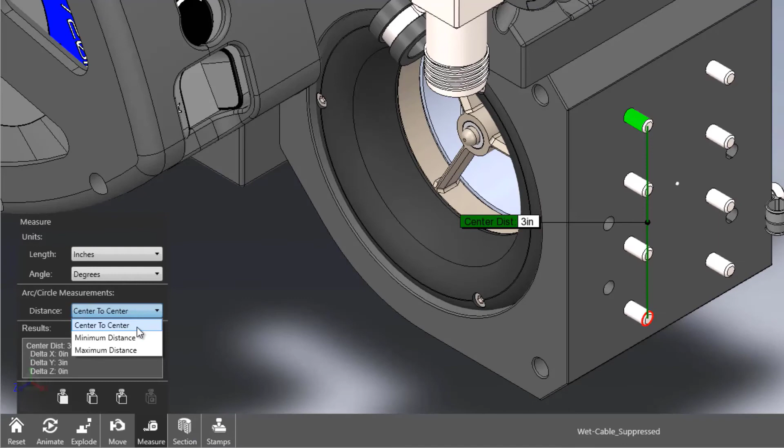Finding the center to center distance of two circular holes or cylindrical objects has always been available, but now in eDrawings 2021, you can choose to view the minimum and maximum distances. You can also measure the normal distance between planar and cylindrical faces.

Sharing your 3D designs without the requirement to install the free eDrawings viewer is easy. All you have to do is save it as the web HTML format. Any modern web browser natively opens these files, allowing the recipient to pan, rotate, zoom, as well as view configurations, exploded states, section views, and even more. eDrawings web HTML format now supports measurements directly inside the web browser.

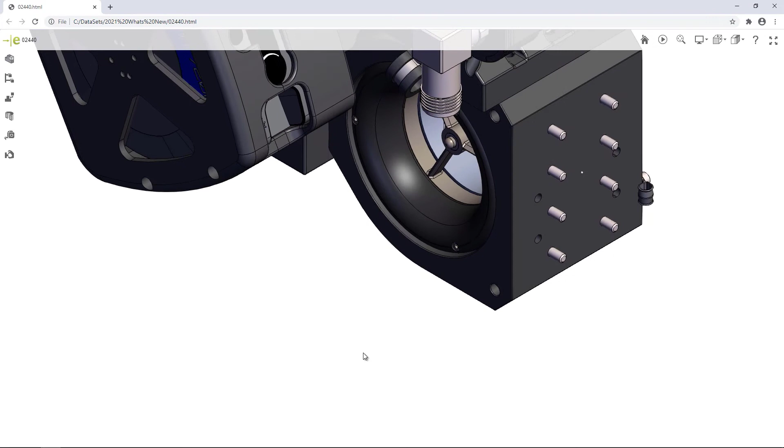Also new in 2021 for eDrawings is the ability to move and rotate individual bodies, making it easier to interrogate large projects without having to dig through an assembly tree. With these new enhancements, you can clearly communicate your concepts, giving the recipient a better understanding of your designs with no installation required. And with that, I'll hand it back to Kieran, who'll take you through all the new exciting stuff inside SOLIDWORKS Visualize.

Thanks for that, Craig. That looks great. Looks like there's some great stuff in there.

Moving over to SOLIDWORKS Visualize, and we've got a few enhancements with Visualize this year, where we've got the addition of configurations, a long needed one in there, and a whole bunch of other things, but we'll jump straight into it. So with Visualize 2021, the interconnectability between CAD and Visualize is even better than it ever has been before.

So as you can see, we've got a few configurations set up in here. And when we jump into Visualize, in previous versions, we would only have access to the previously saved configuration. However, with Visualize 2021, we now have access to all of the configurations within our CAD model, making it quicker and easier to dig down into the components that we're interested in.

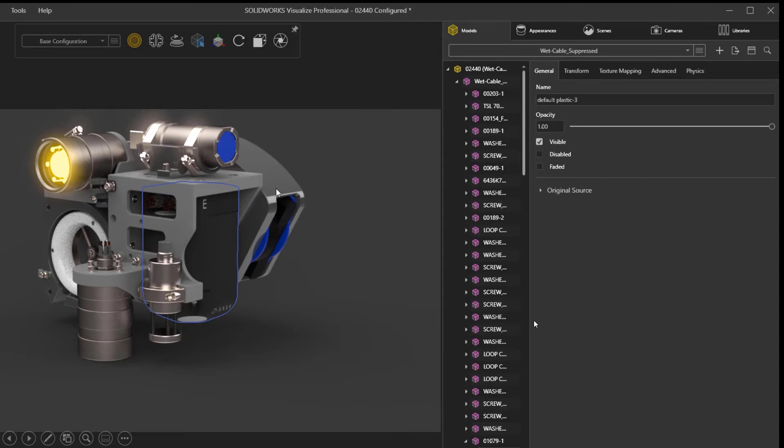Now, applying appearances has always been a quick and easy drag and drop process within Visualize, and the same thing continues with Visualize 2021. However, we have a more streamlined workflow. A single click, as always, is a part selection within Visualize, but now with Visualize 2021, a double click takes us into that part's appearance. This makes it quicker and easier to copy and paste appearances, or even go into the appearance details and edit that a little bit better.

Taking a closer look at this bracket that we have here. Now, this bracket is a component that's made in-house via a 3D printer, so we've got a little bit of work to do with that here. Now, using the previously seen double click on the component, we can dig into the component appearances and start to manipulate the color. But to give it a more realistic look, we're going to go ahead and add in a

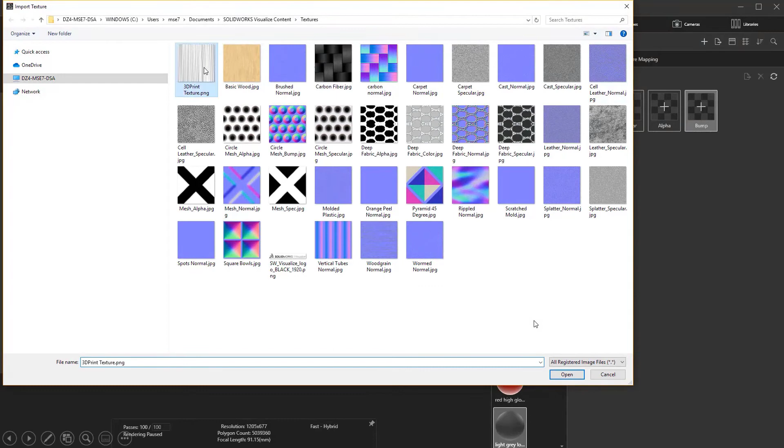texture map. Now, texture maps are a great way of adding some sense of realism within there. And what they essentially do is use what we call a grayscale in order to define to the software how much to offset the surface in order to give that surface finish that we're looking for. In this case, we'll go for the 3D print texture here, and then we'll go ahead and apply that.

Now, adding the depth to this texture has always been a bit of a tricky thing within Visualize, but new with Visualize 2021, we now have the ability for this displacement density. So we can now control exactly how much it is impacting the surface on the component. As you can see, the component on the left there, it's broken up into all these different triangles, and that's basically how it comes into Visualize. But with this displacement density, we're now able to break that up into smaller triangles in order to display that texture mapping a little bit more clearly.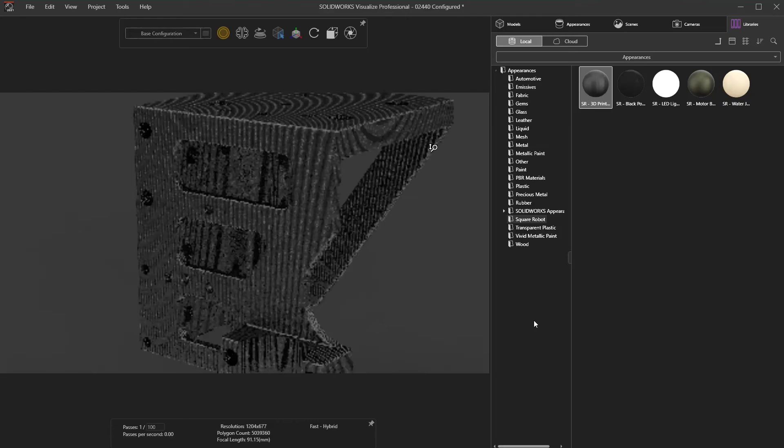We'll go ahead and apply that to the geometry, and all of a sudden it looks a little bit more realistic. Now, in this case, it's a little bit too exaggerated for the 3D printing process that we have. So, as always, what we can do is use a previously saved appearance from a previous project and apply that to the component. We can then finish this off by digging into the appearance again and manipulating that texture mapping to, say, a planar face, and then finally rotate it around 45 degrees so it better meets the 3D printing process of this component.

Moving on to the configurations again. Now, that bracket isn't the only in-house component. We actually have a few more in there, and it's been pretty acceptable that we want to create a rendering of these components alone. Now, a great way of showing some detail within our drawings is with section views, and the same thing applies with our renders, and we've always been able to do this with our section planes.

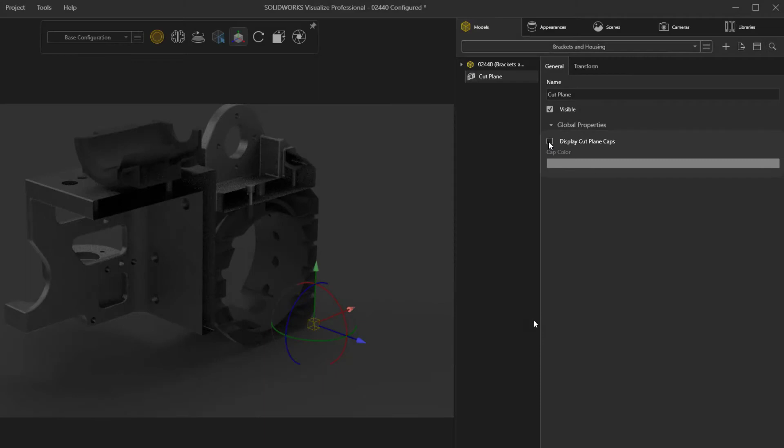However, with Visualize 2021, we now have the ability to show the caps for these section planes or cutting planes, and we can even change the color of those. Now, changing the color really creates some eye-popping images, and we can start to control and add in multiple cutting planes and hide and show the visibility of them via the right mouse click.

Moving back over to our full assembly. Now, a realistic image isn't always the best way to go when we're trying to show our concepts. If this is simply a concept design, we might want something which doesn't look too realistic to begin with. So new with Visualize Professional 2021, we now have this toon rendering mode.

It gives it a slightly more cartoony look, but we also have some other presets within there where we have white on black, black on white, or ambient occlusion, which is a real great way of showing some realistic shading in there. That in combination with the edge colouring editing and shading styles, it can really give you some great rendering outputs from it.

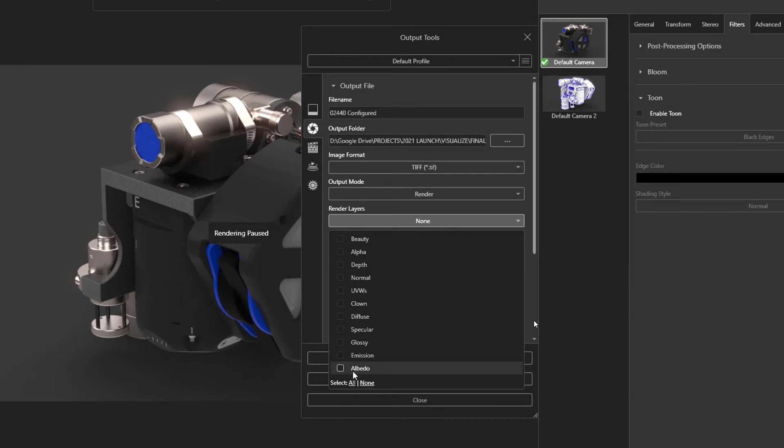Jumping back to the main model and looking at our outputs. Now, creating individual output layers has been a thing that we've been able to do within Visualize for quite a while now, whether it be we want to render out the beauty layer, clown, or emission even. Well, with Visualize 2021, we now have the ability to render all of these outputs at the same time, whereas previously we needed to do these all individually.

So we can now more quickly and easily get out the layers that we're interested in order to create our final images. Again, the streamlined processes just make it quicker and easier to create our final output renders. Now I'm pretty sure you can see we've got quite an action-packed set of enhancements there for Visualize 2021.

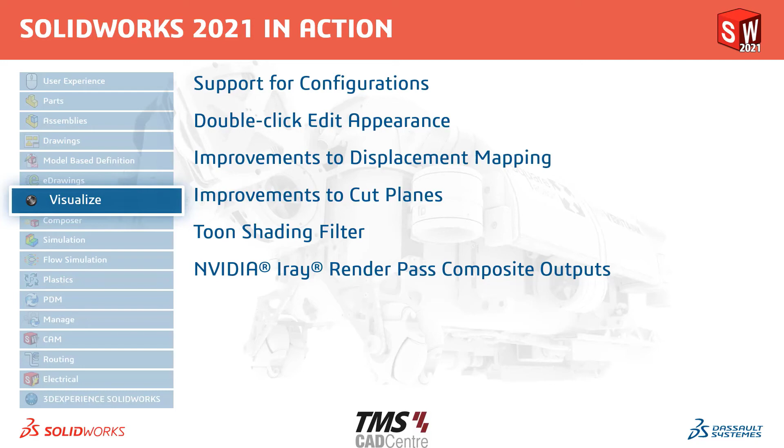I'll give you guys a few minutes. You can just pop your answers in the question box. And in a little bit, we'll come back and we'll have a look to see what the answers are.

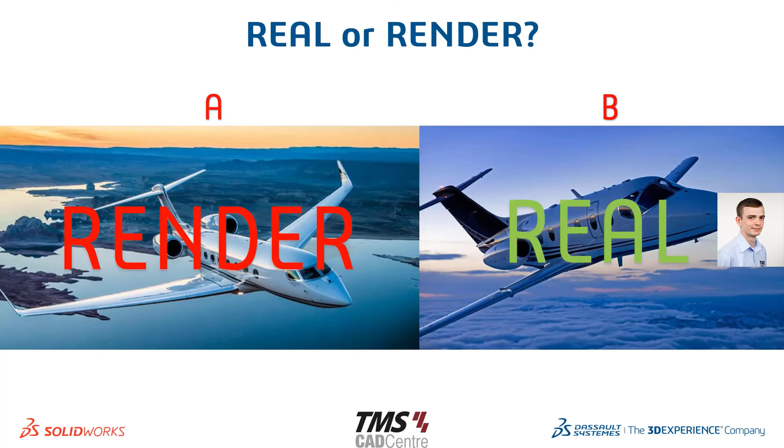In fact, believe it or not, image A is actually a render from SolidWorks Visualize. It just goes to show you just how good the application can be when we put it to use. We can get some realistic images out of it, which is great for marketing, of course, or to have a little bit of fun like this. Thanks for that, Kieran. I've got to say, Visualize is probably one of the things I'm always most excited for when I see the what's new.

So taking a little bit of a step to the side, what we're going to look at next is a little bit of information regarding the installation and the system requirements for SolidWorks 2021, as well as things to do with PDM, SNLs, server operating systems, all that sort of thing. When it comes to installing SolidWorks 2021, the system requirements from 2020 haven't changed too much. What I've done is I've listed the base requirements that SolidWorks give, so the minimum requirements on the left. Then I've added in what we at TMS recommend.

For the processor or CPU side of things, obviously SolidWorks recommends 3.3 gigahertz or higher. Generally, you want that to be the base clock and not the boost clock that the processor goes to. And if you're going down the Intel line of processors, using a Xeon processor is generally much more recommended than using a normal i7, i9, and that sort of idea. For the memory or RAM in the machine, 16 gig is generally more than enough.

If you are someone who does a lot of simulation or Visualize work, so doing some renders, going up towards 32 gig, 64 gig of RAM is recommended a bit more. And also, if you have a Xeon processor, getting RAM that's ECC is much better for reliability as well. For the graphics card, I'll go into detail a bit more on that on the next page, but these are two good baselines to get started.

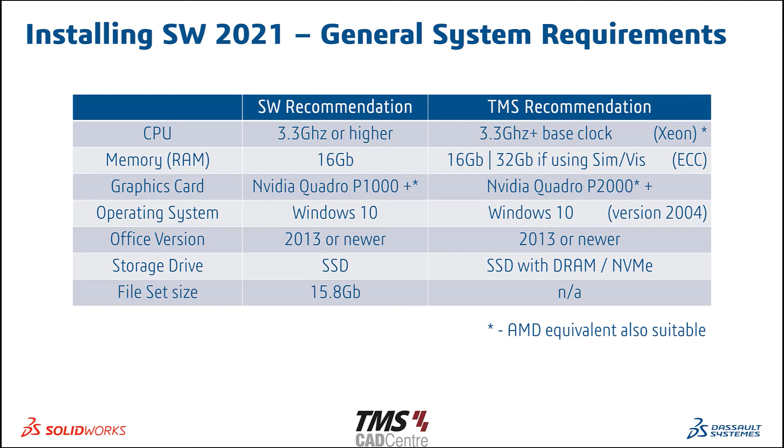The RTX Quadro cards are the newer and up-to-date ones. You can get away with one generation older, so the P graphics cards or even the T series. But if you're looking to buy a new graphics card, I'd probably be looking at the Quadro RTX cards for the NVIDIA side of things. And if you're wanting the AMD side, the Radeon Pro graphics cards are their CAD side of things.

Just make sure you're trying to avoid the gaming side of graphics cards, because they'll still have the prefix for things like RTX, but they'll generally have the GeForce prefix rather than a Quadro, which, although they might work, tend not to be as great for reliability and also aren't fully supported with SolidWorks, so you could potentially come into some issues there.

When it comes more to the PDM side of things or the server requirements, not a whole lot has changed since 2020, but I just wanted to remind people what they are, because we have seen a lot of people wanting to upgrade to PDM 2020 and 2021, but it turns out the server side of things isn't quite up to par for the software.

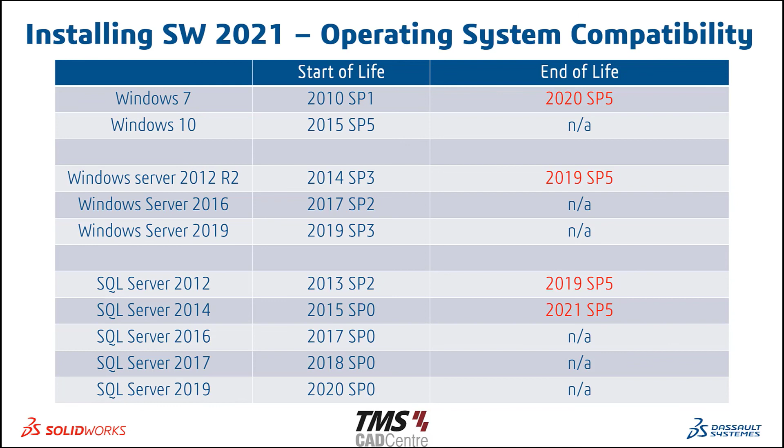Then if you're storing your data on a network drive or on your local machine, make sure you're backing up all of those folders, including any design libraries and toolbox that you might have edited and made changes to as well. Inside SOLIDWORKS itself, I would also recommend you have both the backup and the recovery options turned on. That'll be inside your SOLIDWORKS system settings, and that can give you a quick solution should SOLIDWORKS ever crash or your computer blue screen or anything of that nature. That way you can get a backup from maybe 10 minutes ago, rather than having to phone up IT, getting them onto the server and getting a backup from there, or just generally losing potentially hours of work.

If you do have any questions about the backups or you want to make sure you're doing the backups correctly, just get in touch with us and we can help you out from there. And from there, I'll pass it back to Scott now, who will give you a quick overview of day one and a little sneak peek at what's to come with day two tomorrow.